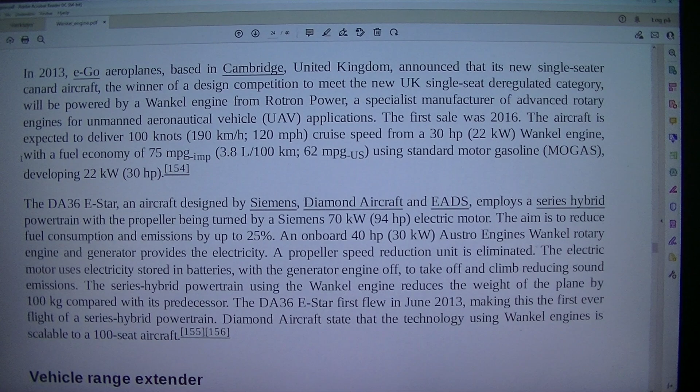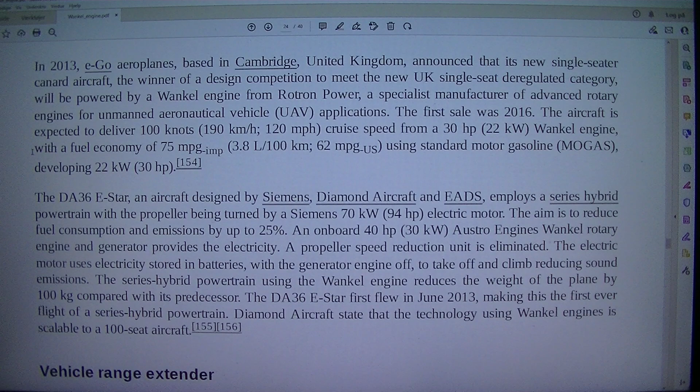But now we are in year 2022, now I think about year 2030. It's not legal to sell combustion engines in Europe, in the EU anymore. They will forbid selling it because of the exhaust emissions. Yes, but let's read it finish. I need to go to my bed. No, in 10 years it's maybe not legal anymore to sell cars with fossil fuel engines. Only in Europe, but of course you can buy it everywhere else.

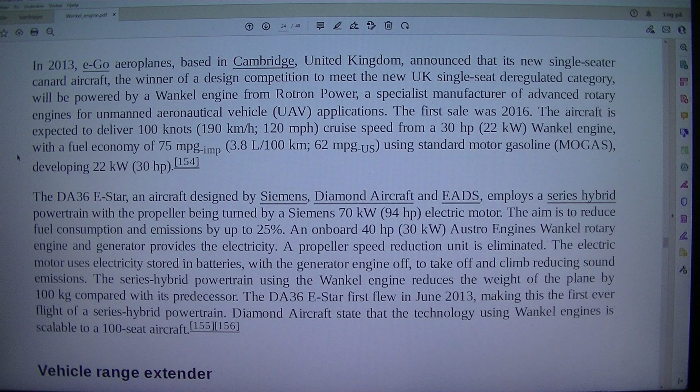In 2013, e-Go Aeroplanes, based in Cambridge, United Kingdom, announced that its new single-seater Canard aircraft, winner of a design competition to meet the new UK single-seat deregulated category, would be powered by a Wankel engine from Rotron Power, a specialist manufacturer of advanced rotary engines for unmanned aeronautical vehicle (UAV) applications. The first sale was in 2016. The aircraft is expected to deliver 100 knots, 190 kilometers per hour, 120 miles per hour cruise speed from a 30 HP, 22 kilowatt Wankel engine with fuel economy of 75 miles per gallon imperial, 3.8 L/100km, 62 miles per gallon US, using standard motor gasoline (MOGAS), developing 22 kilowatts, 30 HP.

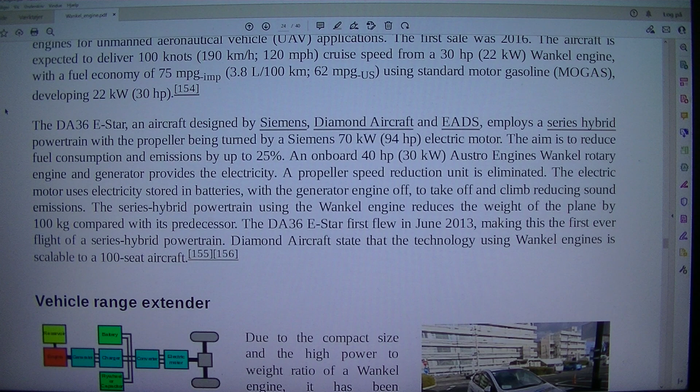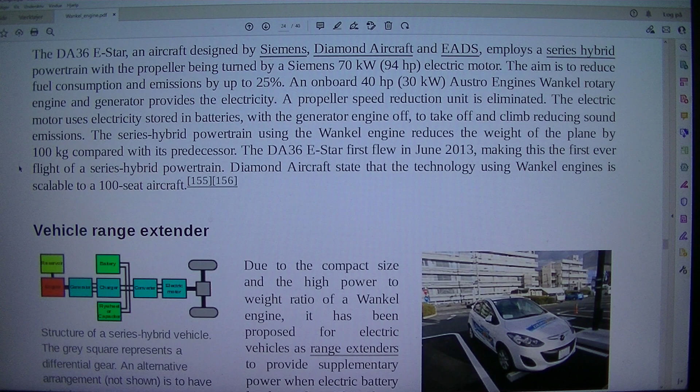154, the DA36 E-Star, an aircraft designed by Siemens, Diamond Aircraft and EADS, employs a series hybrid powertrain with the propeller turned by a Siemens 70 kilowatt, 94 HP electric motor. The aim is to reduce fuel consumption and emissions by up to 25%. An onboard 40 HP, 30 kilowatt Austro Engines Wankel rotary engine and generator provides the electricity. A propeller speed reduction unit is eliminated. The electric motor uses electricity stored in batteries, with the generator engine off, to take off and climb, reducing sound emissions. The series hybrid powertrain using the Wankel engine reduces the weight of the plane by 100 kg compared with its predecessor. The DA36 E-Star first flew in June 2013, making this the first ever flight of a series hybrid powertrain. Diamond Aircraft state that the technology using Wankel engines is scalable to a 100-seat aircraft.

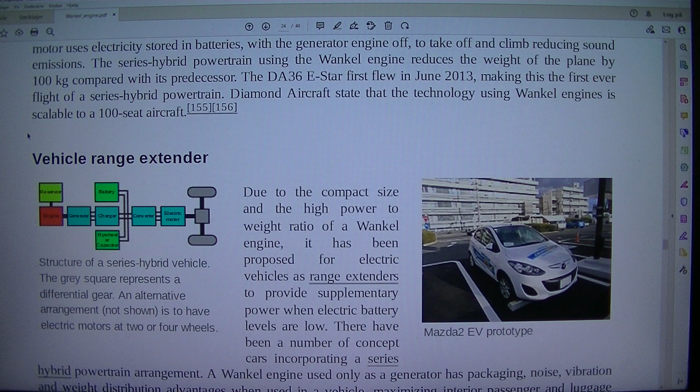155, 156, vehicle range extender. Structure of a series hybrid vehicle. The grey square represents a differential gear. An alternative arrangement, not shown, is to have electric motors at 2 or 4 wheels. Mazda 2 EV prototype. Due to the compact size and high power-to-weight ratio of a Wankel engine, it has been proposed for electric vehicles as a range extender, providing supplementary power when electric battery levels are low.

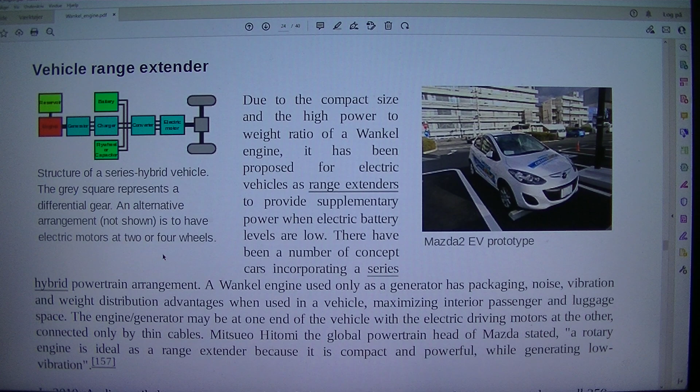There have been a number of concept cars incorporating a series hybrid powertrain arrangement. A Wankel engine used only as a generator has packaging, noise, vibration and weight distribution advantages when used in a vehicle, maximizing interior passenger and luggage space. The engine/generator may be at one end of the vehicle with the electric driving motors at the other, connected only by thin cables. Mitsuo Hitomi, the global powertrain head of Mazda, stated, 'A rotary engine is ideal as a range extender because it is compact and powerful, while generating low vibration.'

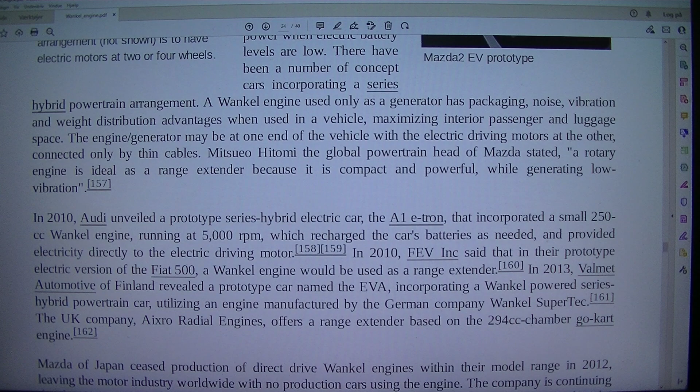157. In 2010, Audi unveiled a prototype series hybrid electric car, the A1 e-tron, that incorporated a small 250cc Wankel engine, running at 5,000 rpm, which recharged the car's batteries as needed and provided electricity directly to the electric driving motor.

158, 159. In 2010, FEV Inc. said that in their prototype electric version of the Fiat 500, a Wankel engine would be used as a range extender.

160. In 2013, Valmet Automotive of Finland revealed a prototype car named the EVA, incorporating a Wankel-powered series hybrid powertrain, utilizing an engine manufactured by the German company Wankel SuperTec.

161. The UK company Aixro Radial Engines offers a range extender based on the 294cc chamber go-kart engine.

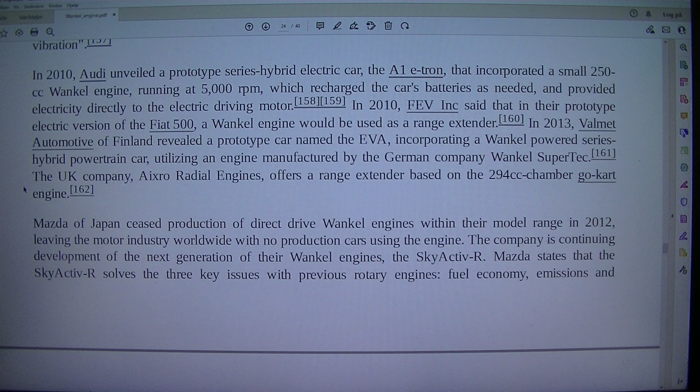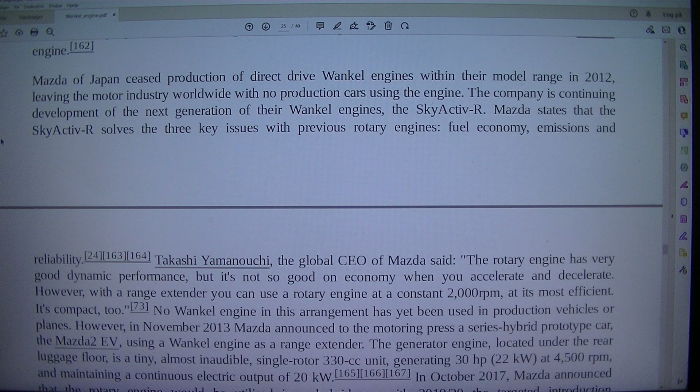Mazda of Japan ceased production of direct-drive Wankel engines within their model range in 2012, leaving the motor industry worldwide with no production cars using the engine. The company is continuing development of the next generation of their Wankel engines. Mazda states that this next generation solves the 3 key issues with previous rotary engines: fuel economy, emissions and reliability.

Takashi Yamanouchi, the global CEO of Mazda, said, 'The rotary engine has very good dynamic performance, but it's not so good on economy when you accelerate and decelerate. However, with a range extender you can use a rotary engine at a constant 2,000 rpm, at its most efficient. It's compact, too.' No Wankel engine in this arrangement has yet been used in production vehicles or planes.

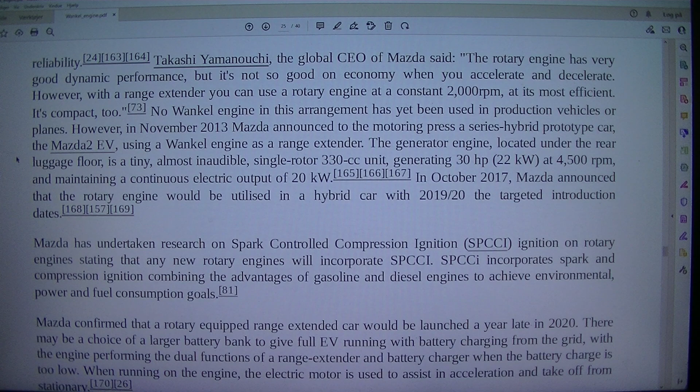However, in November 2013, Mazda announced to the motoring press a series hybrid prototype car, the Mazda 2 EV, using a Wankel engine as a range extender. The generator engine, located under the rear luggage floor, is a tiny, almost inaudible, single-rotor 330cc unit, generating 30 HP, 22 kilowatts, at 4,500 RPM and maintaining a continuous electric output of 20 kilowatts.

In October 2017, Mazda announced the rotary engine would be utilized in a hybrid car, with 2019/20 the targeted introduction dates.

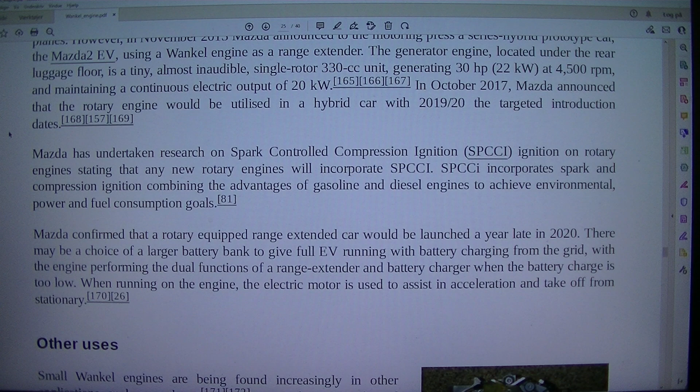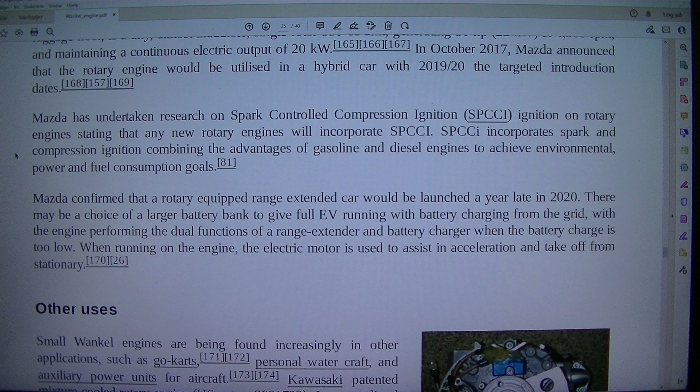Mazda has undertaken research on spark-controlled compression ignition, SPCCI, on rotary engines, stating that any new rotary engines will incorporate SPCCI. SPCCI incorporates spark and compression ignition, combining the advantages of gasoline and diesel engines to achieve environmental power and fuel consumption goals.

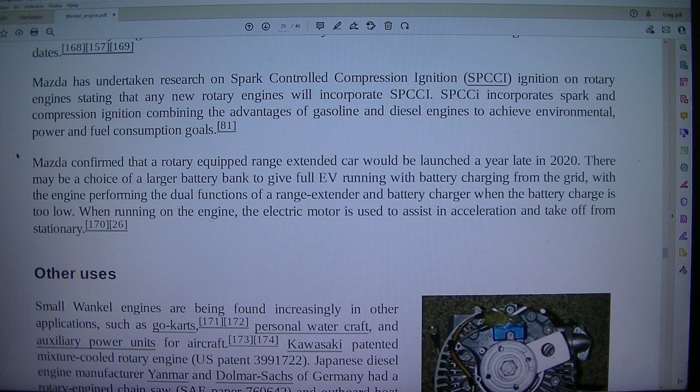Mazda confirmed that a rotary-equipped range-extended car would be launched a year late, in 2020. There may be a choice of a larger battery bank to give full EV running with battery charging from the grid, with the engine performing the dual functions of a range extender and battery charger when the battery charge is too low. When running on the engine, the electric motor is used to assist in acceleration and takeoff from stationary.

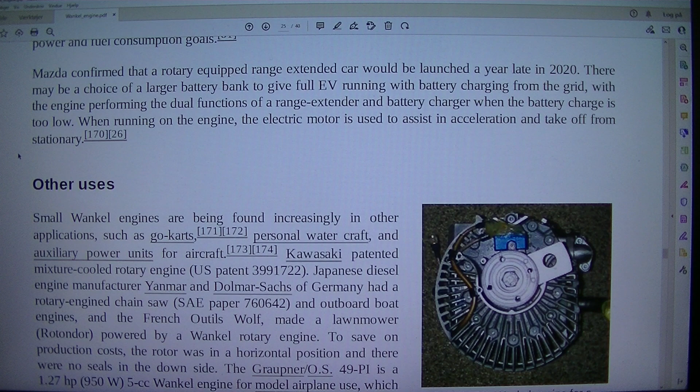Other uses: small Wankel engines are being found increasingly in other applications, such as go-karts, personal watercraft, and auxiliary power units for aircraft.

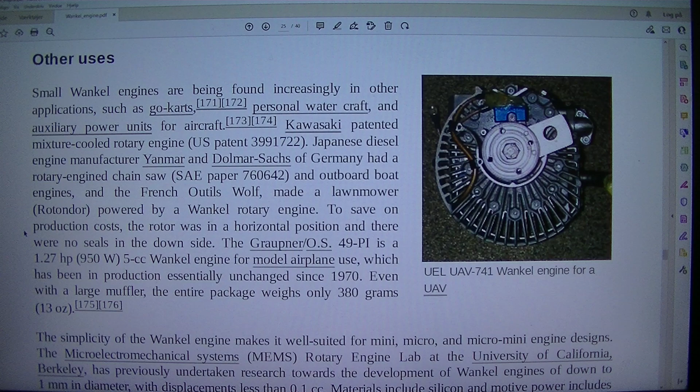Kawasaki patented a mixture-cooled rotary engine, US patent 3,991,722. Japanese diesel engine manufacturer Yanmar and Dolmar Sachs of Germany had a rotary engine chainsaw, SAE paper 760,642, and outboard boat engines, and the French Outils Wolf made a lawnmower, Rotondor, powered by a Wankel rotary engine. To save on production costs, the rotor was in a horizontal position and there are no seals in the downside.

The Graupner/O.S. 49-PI is a 1.27 HP, 950 W, 5cc Wankel engine for model airplane use, which has been in production essentially unchanged since 1970. Even with a large muffler, the entire package weighs only 380 grams, 13 ounces.

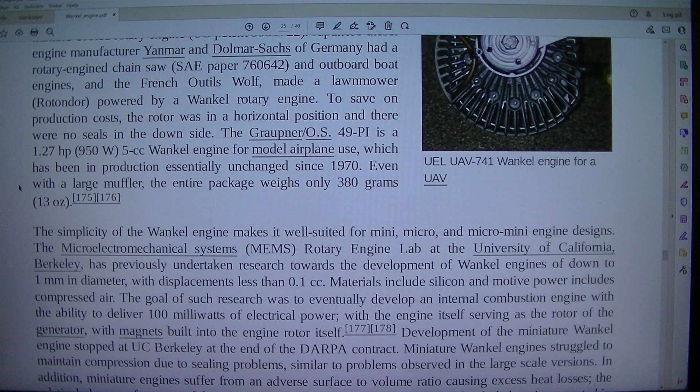The simplicity of the Wankel engine makes it well suited for mini, micro, and micro-mini engine designs. The Microelectromechanical Systems, MEMS, Rotary Engine Lab at the University of California, Berkeley, has previously undertaken research towards the development of Wankel engines down to 1 mm in diameter, with displacements less than 0.1 cc. Materials include silicon and motive power includes compressed air.

The goal of such research was to eventually develop an internal combustion engine with the ability to deliver 100 milliwatts of electrical power, with the engine itself serving as the rotor of the generator, with magnets built into the engine rotor itself.

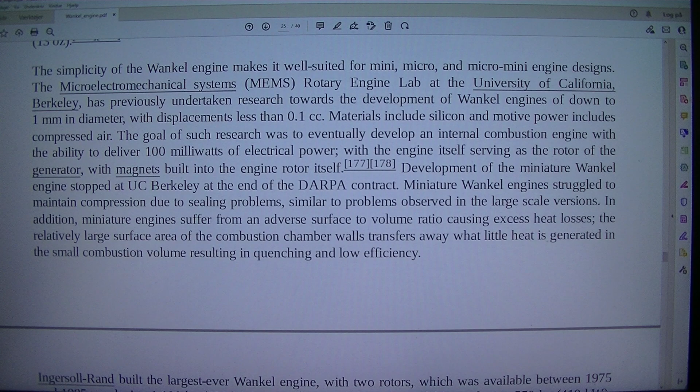Development of the miniature Wankel engine stopped at UC Berkeley at the end of the DARPA contract. Miniature Wankel engines struggled to maintain compression due to sealing problems, similar to problems observed in the large-scale versions. In addition, miniature engines suffer from an adverse surface-to-volume ratio causing excess heat losses. The relatively large surface area of the combustion chamber walls transfers away what little heat is generated in the small combustion volume, resulting in quenching and low efficiency.

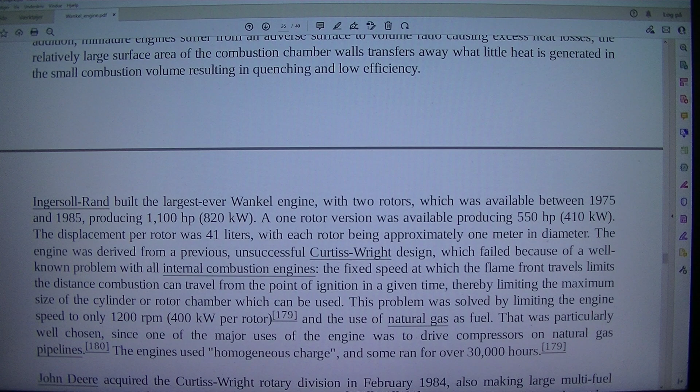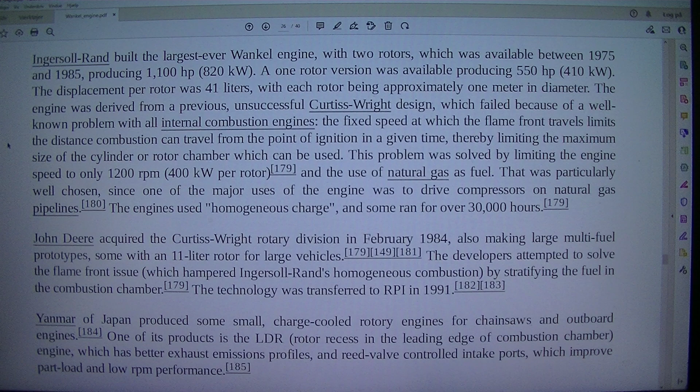Ingersoll Rand built the largest ever Wankel engine, with 2 rotors, available between 1975 and 1985, producing 1,100 HP, 820 kilowatts. A 1-rotor version was available producing 550 HP, 410 kilowatts. The displacement per rotor was 41 liters, with each rotor approximately 1 meter in diameter. The engine was derived from a previous, unsuccessful Curtiss-Wright design, which failed because of a well-known problem with all internal combustion engines. The fixed speed at which the flame front travels limits the distance combustion can travel from the point of ignition in a given time, thereby limiting the maximum size of the cylinder or rotor chamber which can be used.

This problem was solved by limiting the engine speed to only 1,200 rpm, 400 kilowatts per rotor, and the use of natural gas as fuel. That was particularly well chosen, since one of the major uses of the engine was to drive compressors on natural gas pipelines.

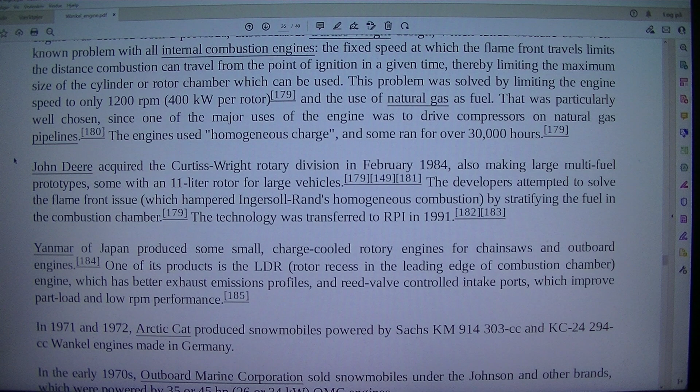The engines used homogeneous charge, and some ran for over 30,000 hours. John Deere acquired the Curtiss-Wright rotary division in February 1984, also making large multi-fuel prototypes, some with an 11-liter rotor for large vehicles.

The developers attempted to solve their flame front issue, which hampered Ingersoll Rand's homogeneous combustion, by stratifying the fuel in the combustion chamber. The technology was transferred to RPI in 1991.